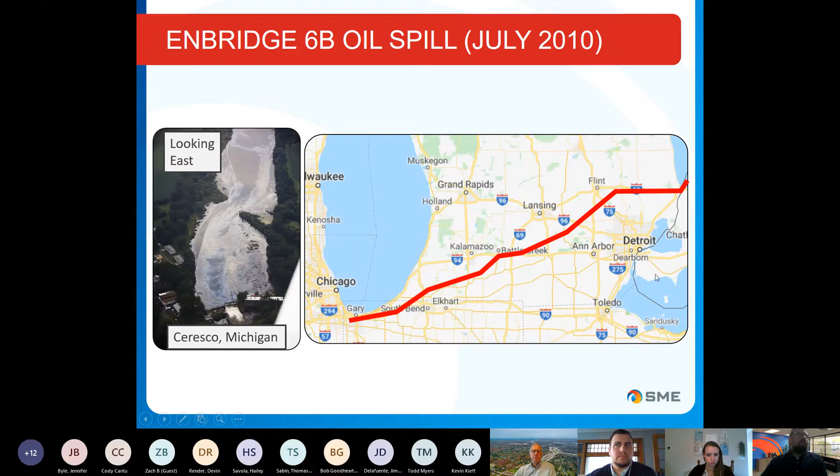The replacement project got rolling, and in September 2013, SME was notified of an observed settlement within the pavement of US 131, just south of Schoolcraft at the new 6B crossing location. After the cause of the settlement was found to be the jack and bore pipe installation of the new 6B pipeline, MDOT put a hold on all upcoming trenchless crossings below MDOT roadways that were part of this project. In order for the contractor to proceed with the remaining crossings, MDOT required a feasibility study, including soil borings, at each crossing location. They also required full-time inspection for each crossing, including documentation of the contractor's means and methods, as well as monitoring of the roadway for movement prior to, during, and after each crossing was completed.

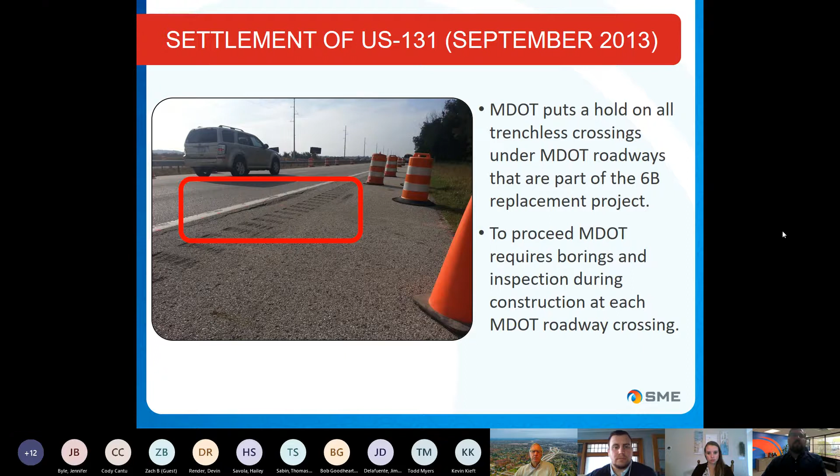From September 2013 to about August 2014, SME observed over 15 trenchless pipeline installations as part of the 6B replacement project. To fulfill MDOT's requirements, I performed multiple feasibility studies, and for almost 6 months during that time frame, followed multiple pipeline crews across the state to ensure that further damage did not occur to MDOT's roadways. This is probably where I got some of the best training relating to horizontal auger bore installations and cross-country pipeline type installation projects in general.

I just want to emphasize, I really think you can learn a lot by following a pipeline crew across the state. I would encourage, if you have the opportunity to see one of these trenchless installations, go out and see it. You can learn a lot from the contractor, and it puts a lot of things in perspective if you have those opportunities.

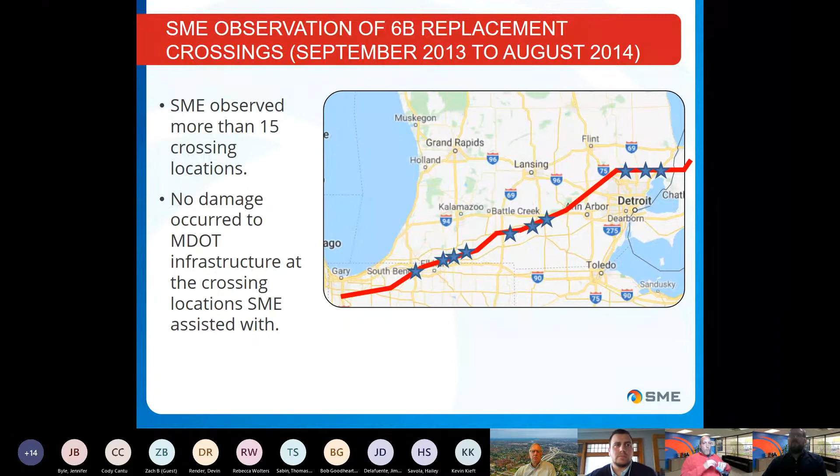As a result of the 6B replacement project, MDOT started to rethink some of the permitting requirements for future trenchless installation projects. MDOT recognized there was a need to have some sort of geotechnical requirements for these types of projects going forward. In July of 2015, MDOT released a 2-page guidance document describing the geotechnical requirements for all trenchless installation permit applications going forward.

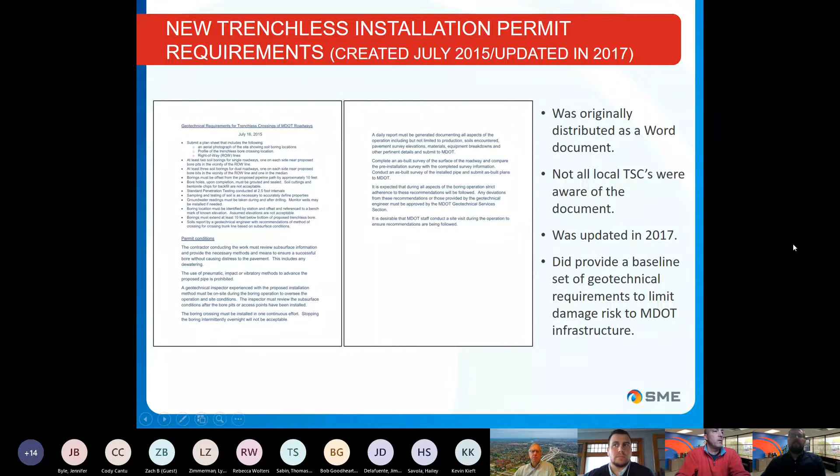There were some initial growing pains with this document. It was initially distributed by email as a Word document, and not all local TSCs were aware of some of the requirements that were outlined. In 2017, the document went through a revision, and there were some issues with getting this updated document distributed. However, despite some of these early adoption issues, it essentially provided a base set of requirements for contractors and designers to follow, and it really started to get people to think beyond the benefits that a trenchless installation can provide, and to think about whether or not it is actually feasible for that given project or site and the constraints associated with it.

Jumping forward in time to January 2019, we get the bones of the 2015 and 2017 geotechnical requirements document put into what's called MDOT Form 3702, titled Application Requirements for Trenchless Installations. Form 3702 is publicly available on MDOT's website and provides not only geotechnical requirements, but also plan and design requirements that must be provided as part of the permitting application process to do these crossings below MDOT roadways.

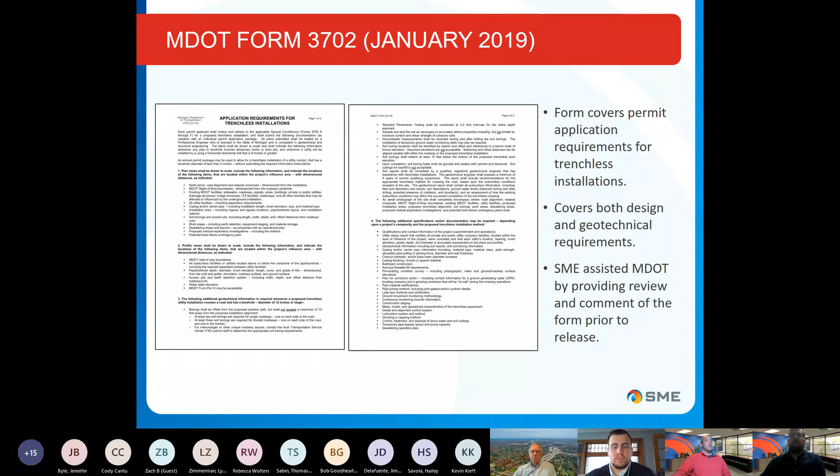To MDOT's credit, this type of document is somewhat unique to this geographical area. The Indiana Department of Transportation outlines certain requirements within their 2020 standard specification manuals for trenchless utility installations that somewhat infer similar requirements outlined in Form 3702. I'm not aware of any design or feasibility study requirements for the Ohio Department of Transportation. In addition, I haven't come across any similar requirements existing at the county or city level within the state of Michigan. So this document is somewhat unique in that it spells out to designers and contractors what the expectations are when performing a trenchless project beneath an MDOT roadway.

One thing I want to highlight from Form 3702 is that it references special conditions for each trenchless drilling method recognized by MDOT. Each of these special conditions lists certain requirements for each method. So what I'd like to do today briefly is show you how to access these forms, in addition to Form 3702, on MDOT's website.

So if you open up your internet browser and just Google search MDOT form search, the first hit is going to take you directly to the link you want. This is MDOT's platform for storing all of their various forms and special conditions.

For example, if you wanted to find form 3702, it's fairly easy. You can simply type it into the form number box and it pops up. So if you want to look up this document on your own, it's pretty easy to find.

The other thing that's nice is they allow you to search by title or keyword. For example, if you wanted to look up the special condition for an HDD, or horizontal directional drilling project, you can type that in and up pops the special condition, 3703A. All the special conditions for the different trenchless drilling methods are some form of 3703, so you could simply type in 3703 and get all the special conditions for each of those recognized methods.

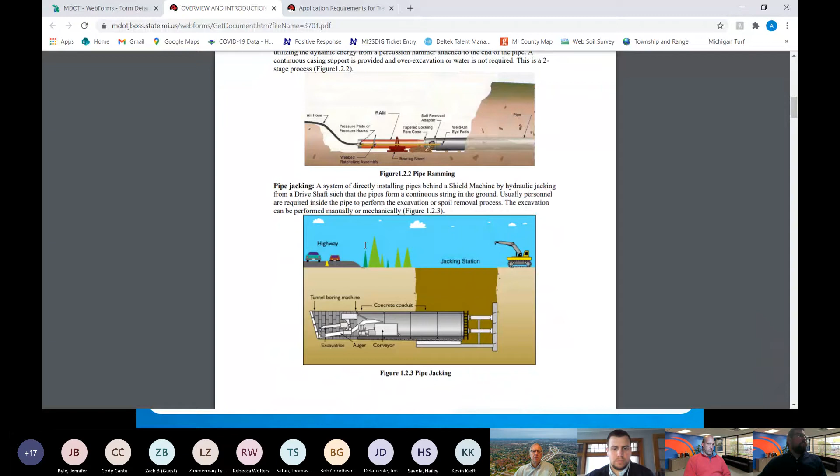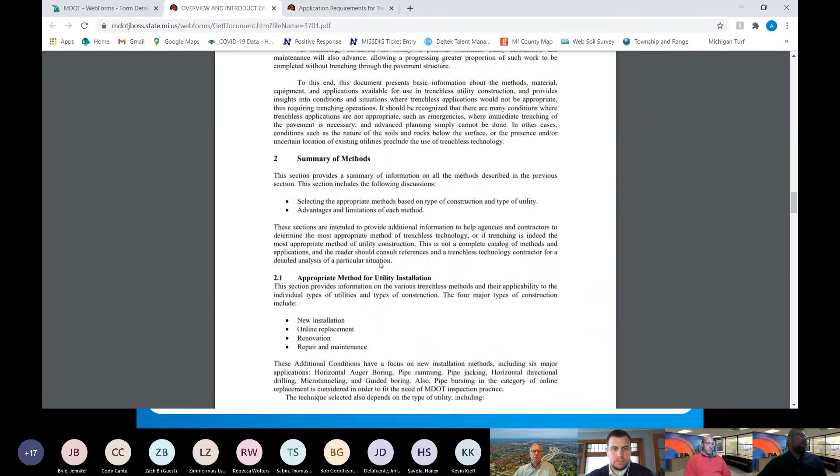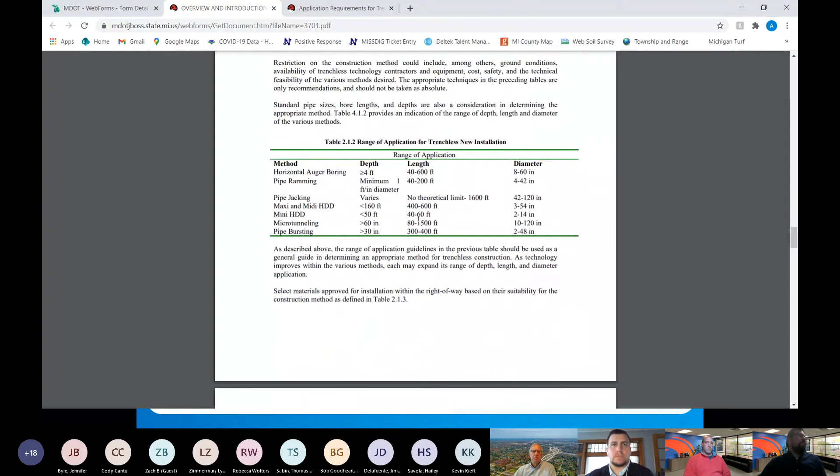Another good form to review if you want to learn more about these trenchless drilling methods, which I'm not going to get too much into today, is to simply type in trenchless. There's a document called form 3701, which gives a general overview of each of the various trenchless drilling methods and the pros, cons, and limitations of each. It's a good starting point if you don't have a lot of familiarity with these methods, and can help you determine if something is feasible for your project, and what constraints or range of applications exist. It's a good place to find that information, and it's pretty easy once you learn the form numbers.

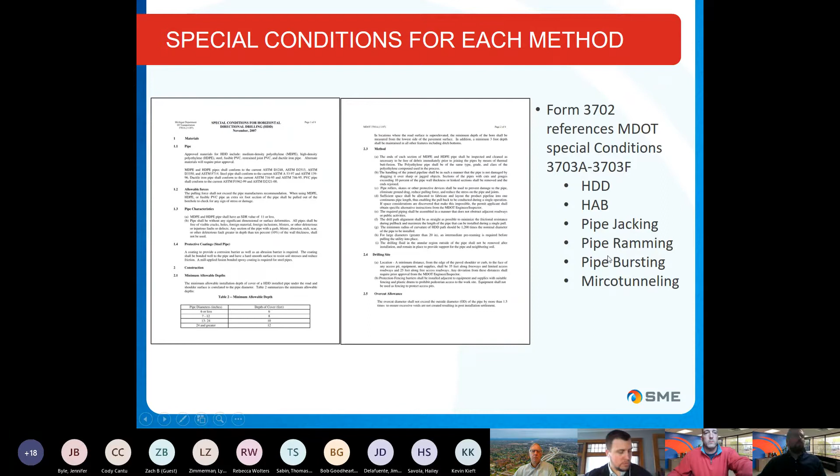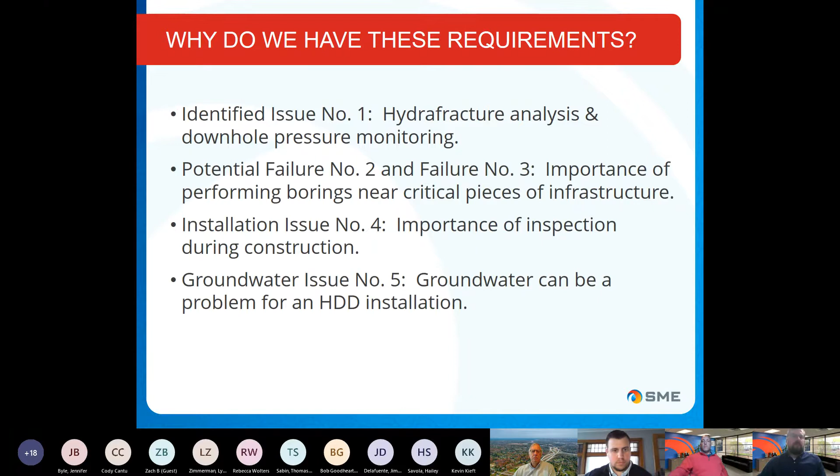So why do we have these requirements? The case studies we're going to highlight today emphasize the importance of a geotechnical study being performed as part of the design process for each of these various types of trenchless utility installations.

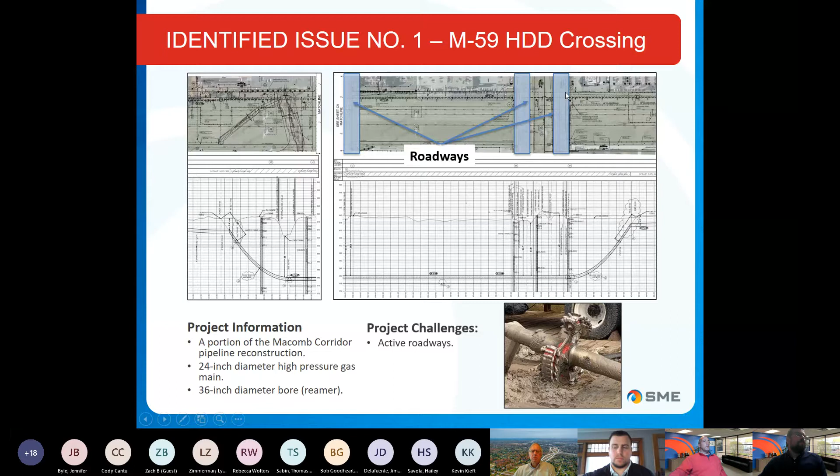The first project I'd like to highlight is an HDD gas pipeline crossing below M59 in Macomb County. This was a 24-inch diameter high pressure gas pipeline installed using HDD methods, consisting of a 36-inch diameter bore—a fairly large pipe and bore operation. Some challenges associated with this HDD installation were three active roadways being crossed, and many existing utilities within the road right-of-way.

We also had very soft clays over clay hardpan. One thing you may not think about when designing an HDD bore such as this is the possibility of old geotechnical borings performed as part of existing development in the area, and what these boreholes can represent to an HDD alignment.

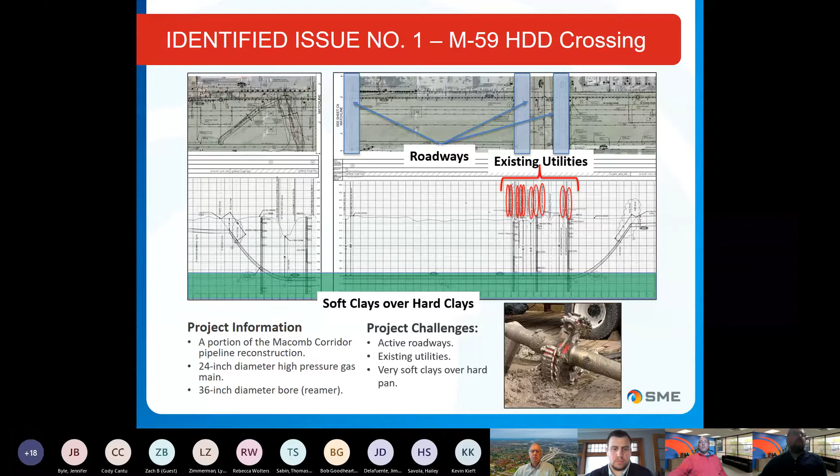What they are is a potential source for inadvertent drilling fluid return. During drilling operations, there were multiple instances of inadvertent fluid return. We had one spot that happened within the median of M59, and another location that occurred within the parking lot of an adjacent business.

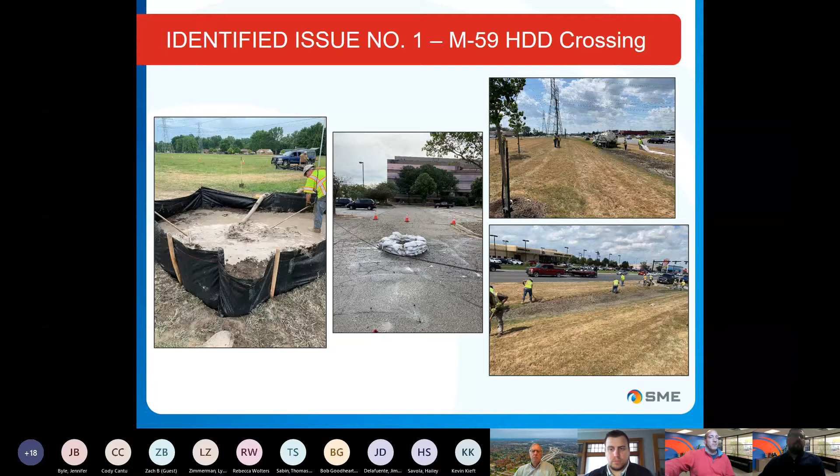You can't always account for every possible route that a drilling fluid could take during HDD boring operations, but there are precautions you can take for a project such as this. Be aware of the type of area you're performing the project in—is it an urban or developed area with greater potential of encountering possible sources for inadvertent drilling mud return? Consider using downhole pressure monitoring so drill pressures can be more closely monitored. Also, sometimes you have to be prepared to perform cleanup operations if something like this were to happen. These are all different things that could have been considered for this project.

So the second project I want to highlight is what I like to call a potential failure, because I believe our evaluation performed pre-design actually prevented a failure from occurring during construction.

The project involves construction of a new drain alignment underneath Hydon Road, which runs east and west, and also a CN, Canadian National owned railroad line. SME was hired to assist with determining the feasibility of installing the proposed drain trenchlessly.

CN Railroad would not allow the drain to be replaced using open cut methods, since this specific set of tracks could be used by as many as 22 freight and 2 passenger trains a day. So it's a fairly busy section of railroad. The main constraint on this project is that the existing tracks had to remain open during construction.

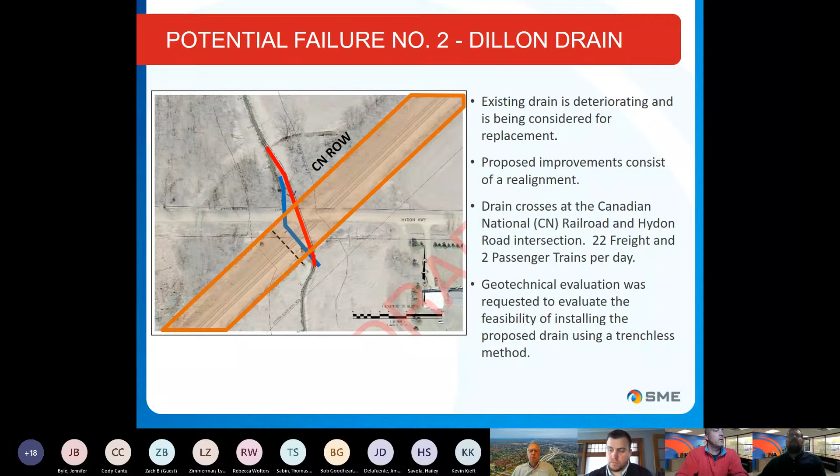So a trenchless installation in this case was given first priority as a way to install this new drain alignment.

Oftentimes when we're asked to perform borings next to an existing railroad, there's a desire to keep those borings outside of the limits of the railroad right-of-way, represented by the orange area in this picture. This is for a variety of reasons. You have to obtain a permit from the railroad, which can take anywhere from a month to, in some cases, a year, and there are special insurance requirements.

There's specific badging and safety training that often needs to be completed for field personnel working at the site. You're required to hire flagmen to direct train traffic as you're doing the work, and you have to pay for special utility locates within the right-of-way itself. In total, these additional requirements can add significant cost to perform the borings, depending on how many days of field exploration are required and how easy that specific owner or railroad is to work with. In this case, Canadian National, CN, was willing to work with us.

On this specific project, the project team, including the design engineer and the owner, recognized the importance of getting geotechnical information as close to the existing tracks as possible. Part of the reason we obtain geotechnical information for these projects is also to try and reduce the risk of damaging the overlying infrastructure during construction.

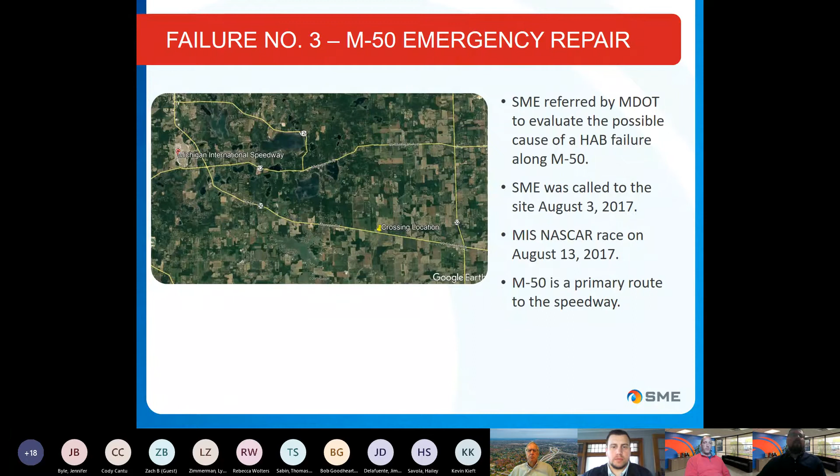The third project I'd like to discuss is about a horizontal auger bore below M50. This is a project where SME was called to take a look at a trenchless drilling failure after it had already occurred. What's somewhat interesting about the timing of this failure along M50 is that it occurred about 10 days prior to the fall NASCAR race at Michigan International Speedway, MIS, and M50 is one of the primary routes into that speedway. So you can imagine MDOT was pretty anxious to get this road open and back up to capacity prior to the race weekend.

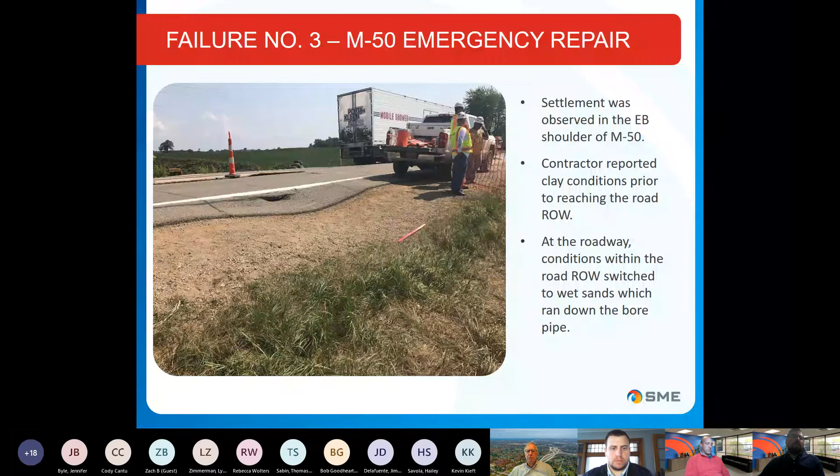What was also interesting about this project is that two borings and a geotechnical evaluation were performed prior to construction. The two borings were performed at the locations shown in this picture, and they showed very favorable conditions, mostly consisting of pretty much entirely clay.

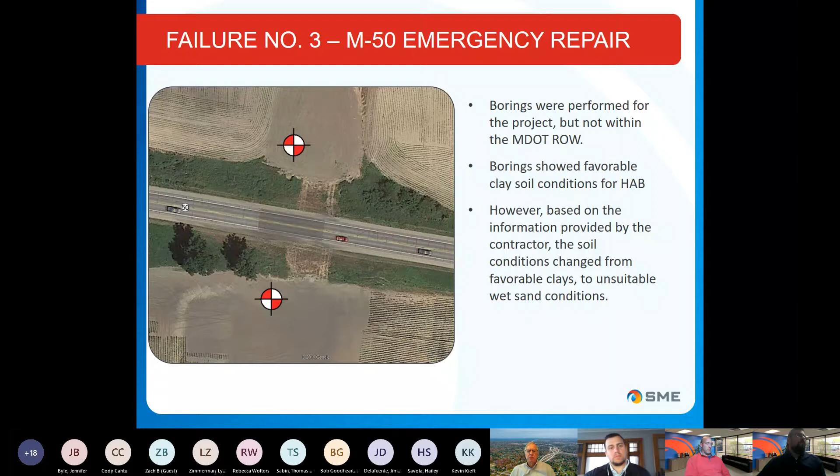However, based on what the contractor told us, these clay conditions were not consistent throughout the length of the bore. So we've got some discrepancy happening beneath the roadway. So what's going on?

What you couldn't tell from that aerial image is that M50 is actually elevated fairly significantly from the surrounding ground surface. What we think happened is that when M50 was originally constructed, sand fill was used to create the existing roadway embankment, essentially creating a bathtub effect for perched groundwater to collect below the roadway surface. Had these borings been performed up at the roadway surface elevation, this condition of perched groundwater could have been identified, and countermeasures such as dewatering or changing the drilling method could have been implemented. It's just another example of why we do borings up at the roadway.

It's going to be a little bit more difficult. We're going to have to get traffic control. There's going to be some extra cost associated there, but these are the types of conditions that we're trying to find that you're not necessarily going to get if you perform these borings in the locations they had for this evaluation.

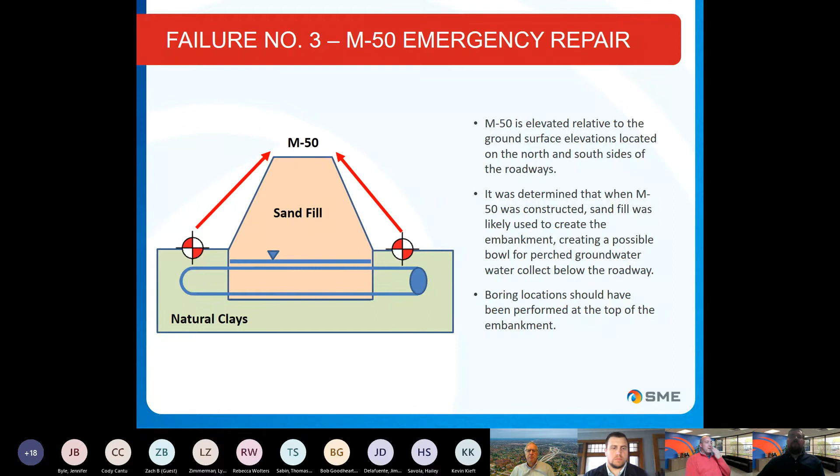So believe it or not, the next issue is also another trenchless drilling project along M50, this time near Tompkins, Michigan. SME was on site for this one to observe a horizontal auger bore installation below M50.

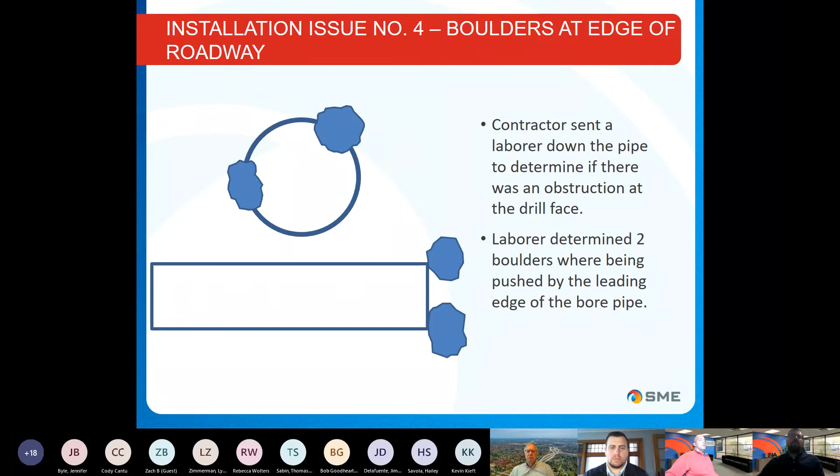What the contractor elected to do in this case was perform a confined space entry and send a laborer down the pipe to identify possible causes of the ground heave at the surface. They found two large boulders stuck at the edge of the bore pipe. Both were too large to go inside the bore pipe, and as a result were essentially being pushed upwards, causing the observed cracking at the ground surface.

Luckily in this case, the bore pipe was far enough away from the edge of the pavement that the contractor was able to excavate these boulders without having to damage the actual pavement surface.

What I want to emphasize in this case study is that by monitoring during construction, we were able to spot this issue in real time, thereby stopping it from progressing to the point where the pavement surface would have been damaged, or they would have had to actually remove pavement to take care of this obstruction.

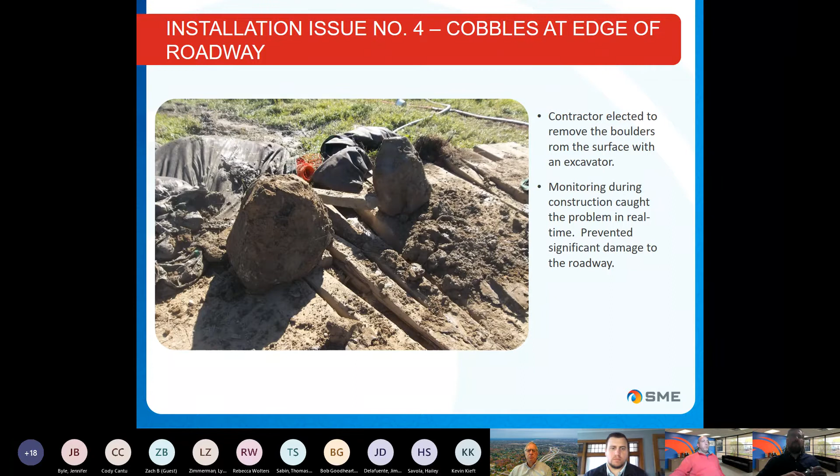Okay, so the last project I'd like to briefly discuss is one we recently performed a geotechnical evaluation for. It was a pretty straightforward HDD gas pipeline installation project. The field work was going really well, and then I got a call one afternoon from our drillers, and he sent me a text message with the following video, which I will play.

If you can't tell, it's a video of our drill augers sitting about 4 feet above the ground surface, and groundwater is just pouring out the top of them. The soil conditions along this proposed HDD alignment had generally consisted of clay, starting at the ground surface and extending all the way to the termination depth of the borings up to this point.

However, at this location, we had a layer of sand that was encountered at a depth of about 30 feet. Within this sand layer was a confined aquifer that, once we penetrated it, immediately brought groundwater up and above the ground surface elevation, as you saw in the video.

Had this condition been encountered during HDD boring operations, it likely would have terminated the bore, potentially even flooded the work zone, and the contractor would have had to try to find a way to plug the hole.

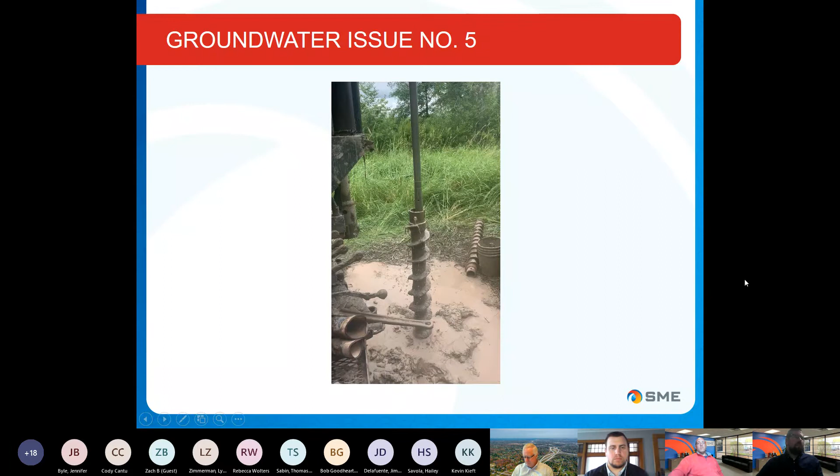So that wraps up my presentation. Before we open up to questions, I did want to mention NASTT, the North American Society of Trenchless Technology. If you're interested in learning more about various trenchless installation methods, they have a bunch of published books about each one that are fairly helpful.

They do offer various courses throughout the year that you can sign up for, for each of these different methods, to give an overview of them. They also have an annual conference called the No Dig Show.

Pretty clever. This year's conference was canceled due to COVID, but they do still have next year's conference scheduled for March 28th through April 1st. It's in Orlando, Florida. It's a really good conference. I went to it two years ago when it was in Chicago for the first time.

They present a lot of really good information. It's basically a lot of case studies, but there are also some design aspects presented through all these different presentations happening throughout the day, depending on which trenchless technology you want to focus on. I highly recommend it if you want to learn more about trenchless drilling and all the different technologies out there. So with that, if there are any questions, please feel free to ask.

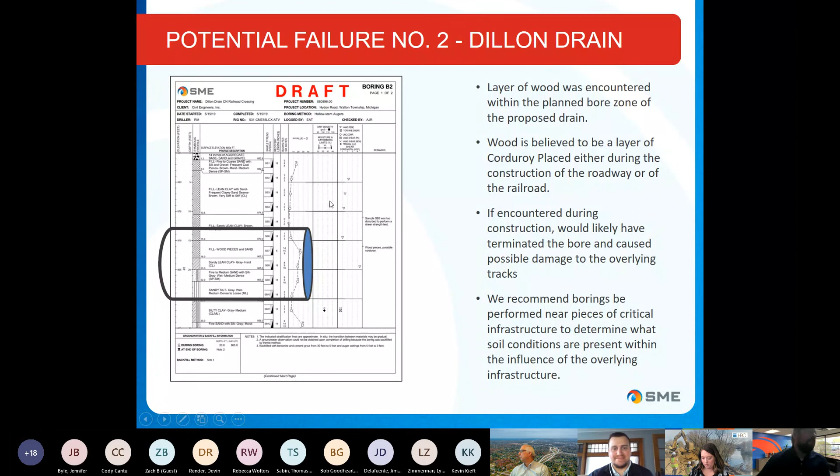So this project, we drilled it in May of 2019. We're still in design, trying to figure out what exactly we're going to do. The plan right now is...

So yeah, the issue with this drain, like I said, is not a capacity issue. It's plenty big enough for what they need. It's just old, very deteriorated at this point. So we're going to be able to rehab that existing section and then replace the remaining. That's the plan.

Does anyone else have any questions for Aaron?